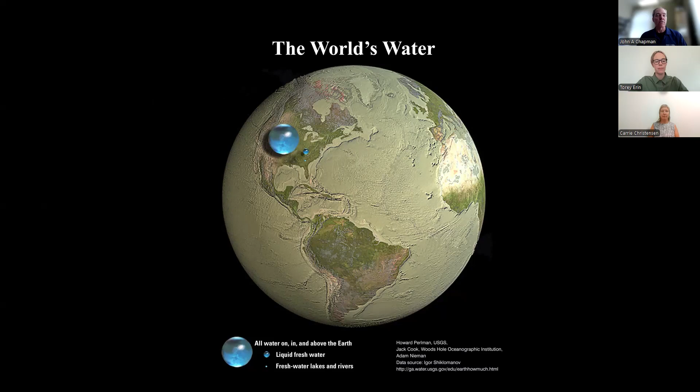So I want to start off just by thinking about the water that we have here. This is an image courtesy of the United States Geological Survey, and the blue dot, the little marble you see, is all the water on Earth ever. The smaller two dots are all of the liquid fresh water, so that's groundwater, lakes, and rivers. And then that tiny little blue dot, it's just like a little period punctuation, is just the freshwater lakes and rivers. And I think it's just absolutely amazing that all the water on this planet has just been reused over and over again for millions of years. And that's really all that there is that we have.

And I specifically want to focus in on the part of this kind of recycling system where the water gets recycled. And as I just said, it's all the water we've ever had. It just goes through this evaporation precipitation cycle over and over again. And I'm really going to focus in on where that raindrop hits the land and what happens to it. And that's going to be the bulk of this presentation.

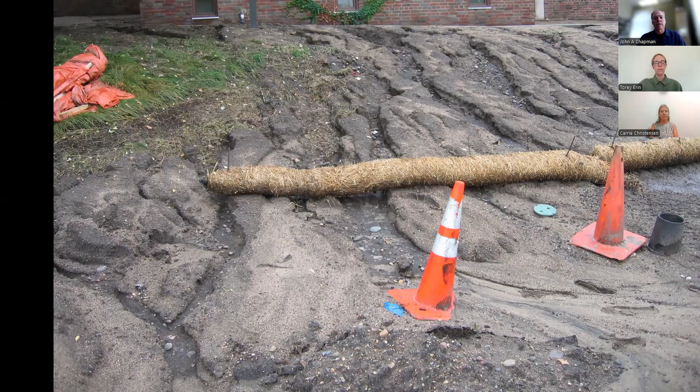And just another photo of soil, just kind of demonstrating. This is one I took showing how dynamic a raindrop impact can look at that soil level, where the soil particles might move up to 3 feet, and all of the pollutants that are attached on those would also be traveling there. So it's an important thing to think about with stormwater management.

How much pollution is too much? And that's a great question, and it depends really on what we're doing. Drinking water needs to be very clean. Swimming water also needs to be very clean. Fishing, if we're consuming the fish, also needs to be very clean. Some fish don't need really clean water to survive. They can thrive in questionable water quality.

Some industrial uses can take advantage of poor water quality. And so it's an interesting balance of understanding how we're using the water and using that as a driver for how clean it really needs to be. And that is an issue when you think about some of these emerging pollutants, like I just mentioned, like PFAS, where we may not know that much about it right now. So we don't know what a safe level is, or we need to do more research to really understand how it's persisting in our environment and how to remove it. So that can be a huge challenge when we have a new product or a new pollutant that's discovered.

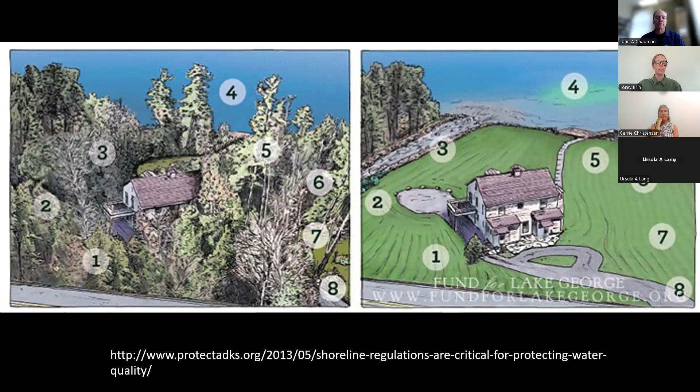So that's one approach. And in a real photograph, you might have something like this, where they've tried to achieve that, where they've clustered development together and left a large buffer between the development and the water resource. That also results in less road pavement, less utility disturbance. So we have more natural soil conditions, and that can all benefit stormwater management. And if you think about that, raindrop travel is going to feel similar to what it was naturally because of these design changes that we've done.

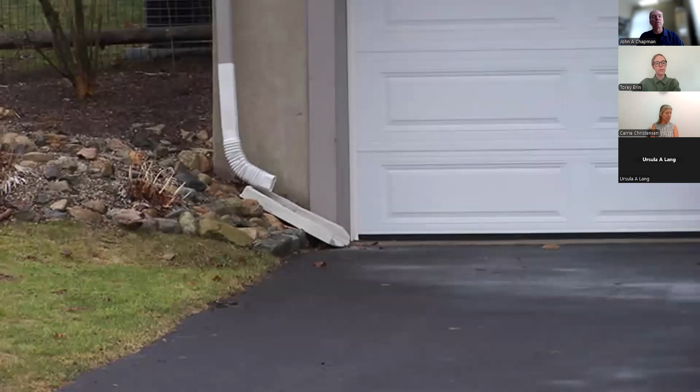Another approach, kind of on the small scale, you think about a downspout coming off of a garage roof. As you see in this picture, that water is going to be moving onto the pavement, from the pavement into the street, and then into a storm drain pipe.

And it has no opportunity to really interact with the soils or the groundwater. And so it might just cause a flooding problem downstream for your neighbor, because naturally it would have moved a little slower and soaked into the ground.

And this might be a correction that's just a point of turning that downspout a different direction. And so the water will flow into the grass and irrigate the grass, and it would be less water that we need to maintain that vegetation. And so something as simple as thinking about those downspouts can be part of your stormwater management.

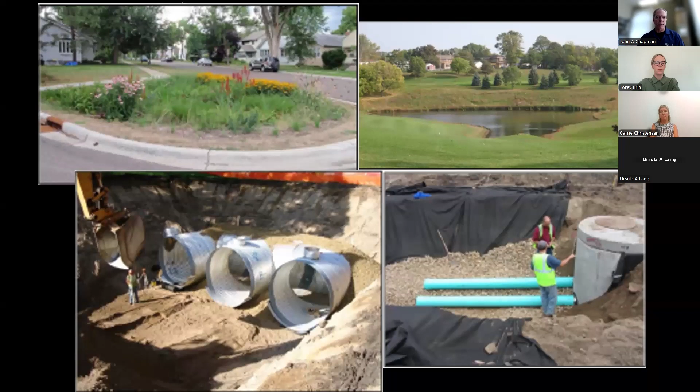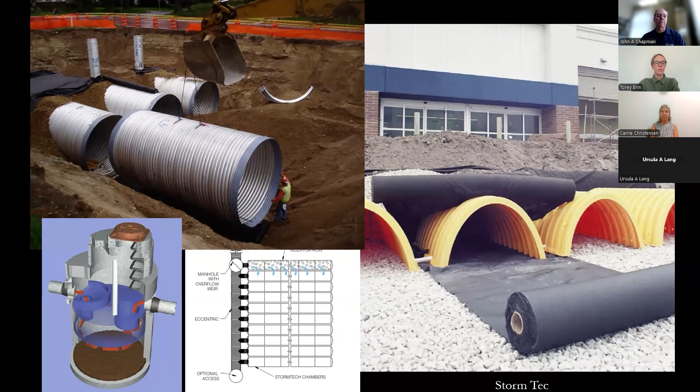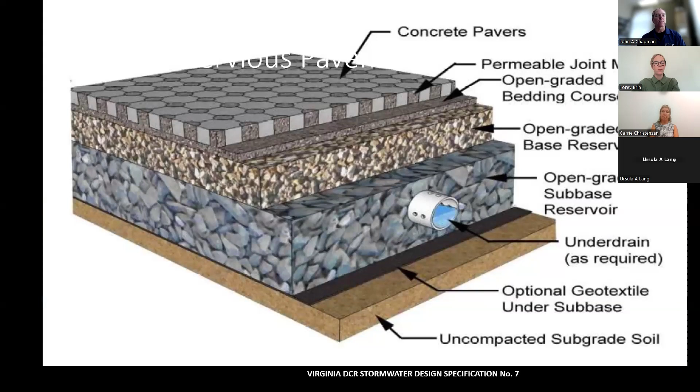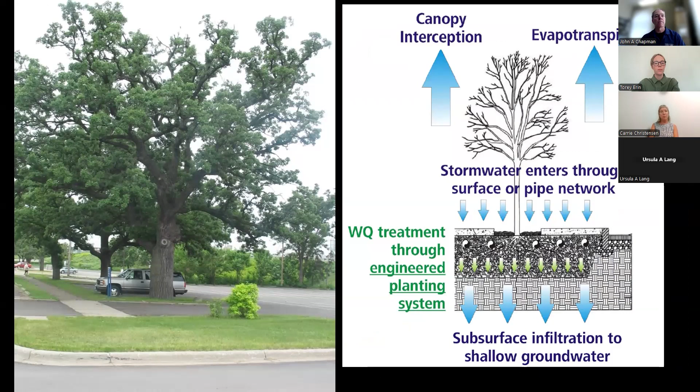And here we have pervious pavements where the water can actually pass through that pavement surface. And then underground, it's going to be stored in some sort of a chamber. It might be a rock-filled void space that holds the water until it can be soaked into the ground or used elsewhere. Sometimes we'll take trees and funnel our stormwater to the tree roots where they can consume it and use it, and it's just an irrigation system. And so that's another approach.

And so in summary of stormwater management, our best thing is to really remove the pollutants that we can as soon as possible, or just learn to use a different sort of item. And road salt is an example; there's a lot of research looking at alternative de-icing elements that can be managed a little bit better than the sodium chloride. We can build smarter. As I showed in some of these photos, we can change the layout of our buildings or our landscapes and do stuff that helps stormwater to be more manageable. And then we can also treat the water, build a system that provides passive treatment.

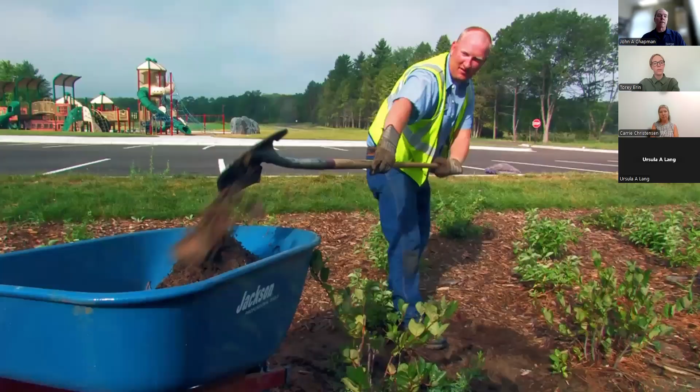And then the last thing that I really haven't touched on yet is maintaining the systems. That maintenance is so important on all of this. As I said before, our stormwater ponds are really like trash cans, and at some point we're going to have to take out the trash. And so this is an example of a pond clean out where it's a significant cost. It's a significant effort. But even small rain gardens also need to be maintained, and there's effort that goes into those beyond the gardening of the plants and these sorts of things.

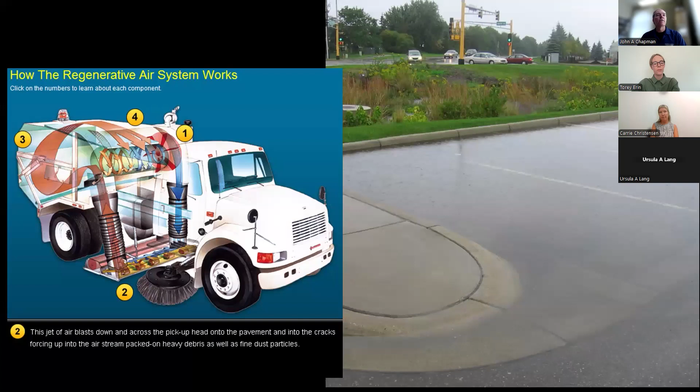A lot of the other features that I talked about, the porous pavements, will require a specialty street sweeper and a lot more street sweeping. These underground systems often need special Vactor trucks and extra training for inspection and some of these things. So it's all needed to keep the system working.

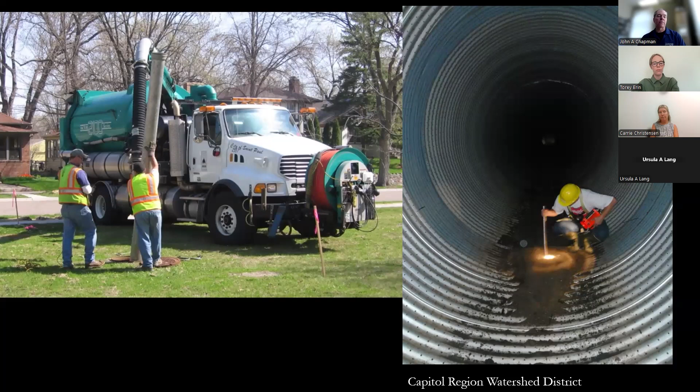That maintenance is so important. And I think I'm about out of time. So I just want to say that clean water is the goal, and keeping pollutants out of our waters can be done in so many ways, from better planning and design to better maintenance. And I've given you a glimpse, kind of the tip of the iceberg here. And I hope that you'll continue to learn about stormwater and what we can do to keep it clean.

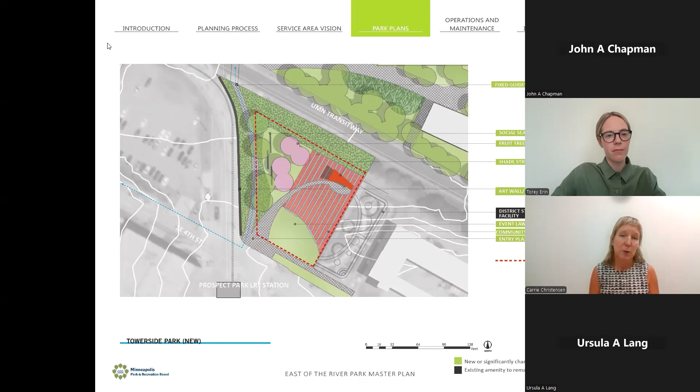And this particular sub-watershed is called Bridal Veil Creek Sub-Watershed, and it is a sub-watershed of the Mississippi. So the Mississippi Watershed Management Organization partnered with us on this project, as well as a developer, and we developed this small park within a larger district. You can see the Bridal Veil Gardens Park is sort of to the lower left of this district.

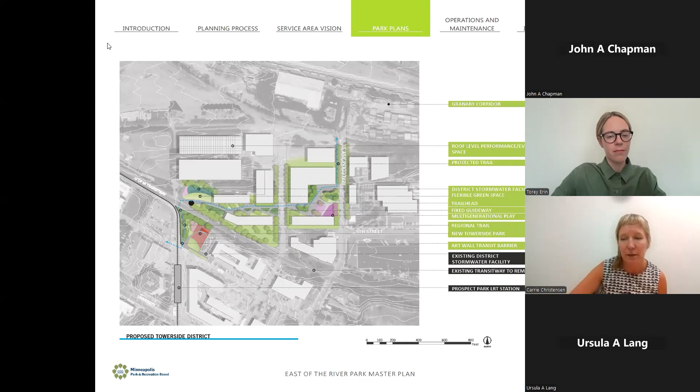And I'm actually hopefully taking the next stages of this project to our board in just a couple of weeks. So it's been over 7 years of collaboration, slow development of this integrated stormwater and parkland and trails and development effort. And it all falls in this even bigger part of our system, which is the Grand Rounds. The Grand Rounds is our parkway system. It emerged as our city grew.

So starting in the 1880s, the Grand Rounds were set aside as linear parks connecting the river and the lakes and creek. They are also a regional trail, and they also offer roadway throughout the park. And there's a missing link of the Grand Rounds, which runs right through Bridal Veil Gardens. And so it's also part of this larger transportation network.

And so when we think about parkland and all the different stacking of functions that happens, it's such an exciting part of managing stormwater, bringing that in as one of these stacked functions in park creation. So the park that I'm talking about today, Bridal Veil Gardens, falls in the Towerside district. So as you look toward the south end there in that segment, very close to the University of Minnesota, actually.

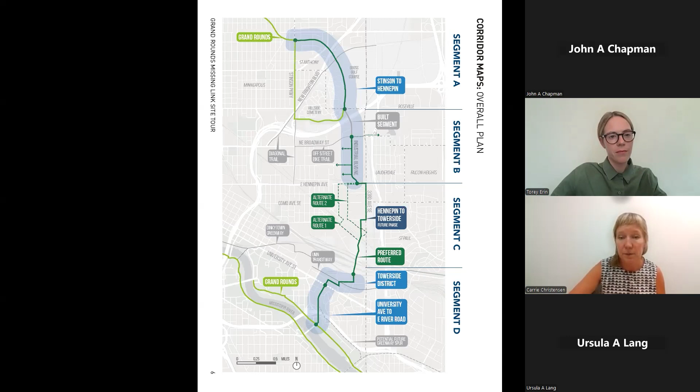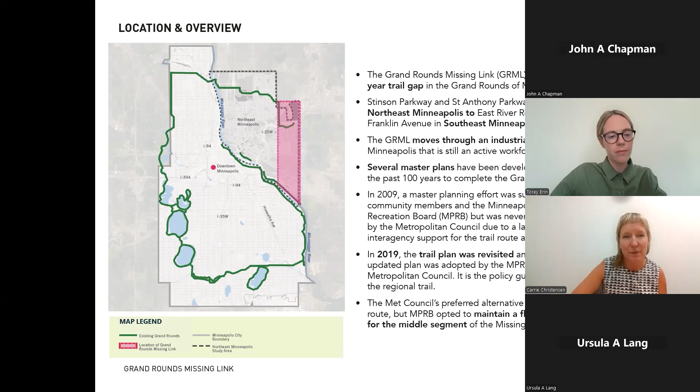And Carrie, can I just stop you for 1 second? Your audio is a little bit choppy, but when you move toward the screen, it sounds a lot clearer. Okay, so I'll stay close. Is that better? Yeah. Thank you.

Yeah, thanks. All right, so one of the important parts of park planning is thinking about all of the different landowners and land managers. We acquired this site from a developer who acquired it from another developer, but there's also city right of way, and then there's a light rail easement, all sort of overlapping into this park. There's also the University of Minnesota land to the north. And so jurisdictionally, it's a complex space, and that's part of the negotiation with any project like this.

And this actually represents the parcel that we purchased and turned into parkland, but it was thanks to community that we had a light rail system built here a decade ago, and thanks to community that advocated hard to bring parkland adjacent to that light rail system, the developer that bought this parcel originally was required to sign a form saying, "I will turn this into parkland." And so in that acquisition process, there were some stipulations by the land seller based on community organizing.

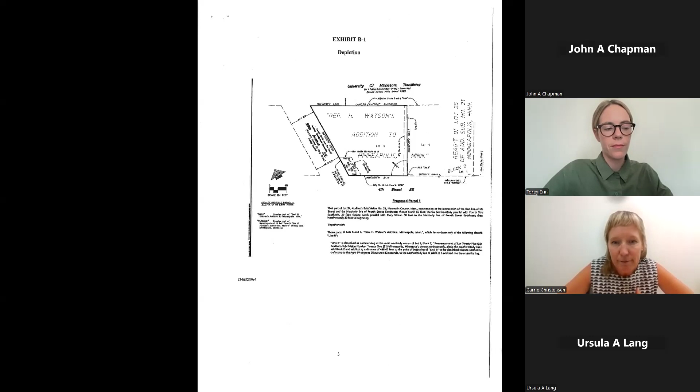So I come into this park design process 7 years after those papers had been signed, and it's an exciting kind of invisible layer of this work that I think needs to be celebrated: all the community advocacy that goes into not only park making, but also keeping our water systems clean and healthy. And so I just wanted to say, it looks like a parcel map, but it represents so much more to me.

So fast forward, after the land was sold and the district is starting to develop, there are a number of different developers. And in the city of Minneapolis, there's a requirement for stormwater fees. So if you create impervious surface in a development, like rooftops or parking lots that are not pervious, you actually pay fees. And so there's a lot of incentive to manage your stormwater on site and create interesting ways to really have that water infiltrate through the earth or be captured and be reused. There's actual financial incentives.

And so a number of developers were convened by the Mississippi Watershed Management Organization, and they said, let's figure out a way to treat everyone's stormwater together and then actually reuse that stormwater for the things that we need, like watering our landscape when it's dry. Maybe we need a car wash at a local gas station, sort of thinking about what are some innovative ways to use water if we were to capture it.

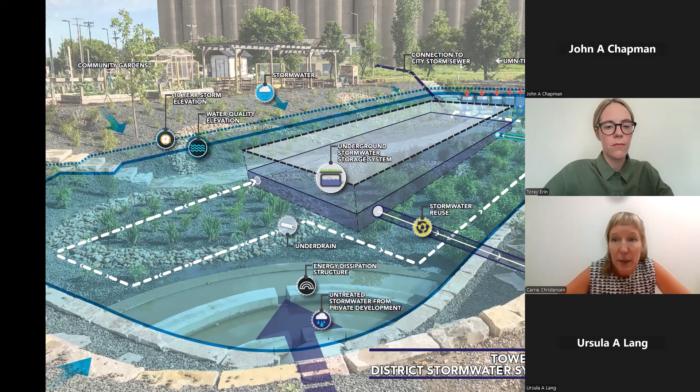So again, the Mississippi Watershed Management Organization brought together, I think it was 6 developers, and designed a system for collecting stormwater off of 6 different buildings in this district. And all of that water flows into this collection tank, this underground stormwater storage system. It comes in through rooftops, some of it through infiltration through the earth, a whole variety of ways. Then this space also doubles as parkland. And then we come in and develop even more parkland right next to it.

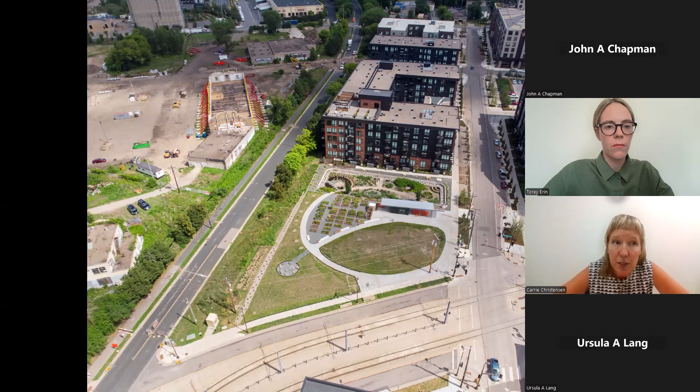And you can see here the district. So those rooftops up towards the top right of this image, the stormwater from those rooftops is coming down and it's getting stored in the underground water tank under the park. And then that water is pumped up to a UV filter in this great little plaza. So you can see the UV filter is actually being put into a picnic shelter. And this shelter sort of doubles as a gathering space. It's actually a garden storage shed as well.

And there's a filter in there that filters the water and brings it up to the standard that's required for use for things like watering a community garden. So one of the things that we developed in the park was a community garden. And now we are able to water those community garden plots with stormwater. So it's really exciting thinking about that very urban condition in this situation. But I think it applies across any context where it's just stacking those functions of stormwater management into community building, into food production, into parkland. We also water the lawn at the park with the stormwater.